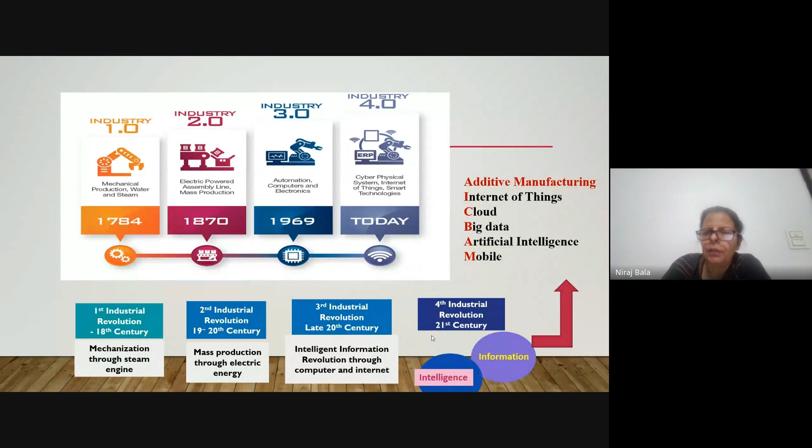This was followed by the second Industrial Revolution in the 1870s, when the assembly line, production line started. Then the third revolution, when computers and automation started. And today, participants, we are part of Industry 4.0. If you see the various technologies which are driving Industry 4.0, amongst the other technologies, you will see that additive manufacturing is one of the core technologies driving our present industry. So it is essential that we understand, we work on this additive manufacturing, and we introduce this technology to our technical students.

So additive manufacturing, also known as 3D printing, I will not go much in detail because of the introduction. I will mostly be discussing the topic given to me, that is, what are the different materials which we use in additive manufacturing. But just a brief introduction: 3D printing is also known as additive manufacturing because we are not subtracting any material like other manufacturing processes, we are adding materials, so we call it additive manufacturing.

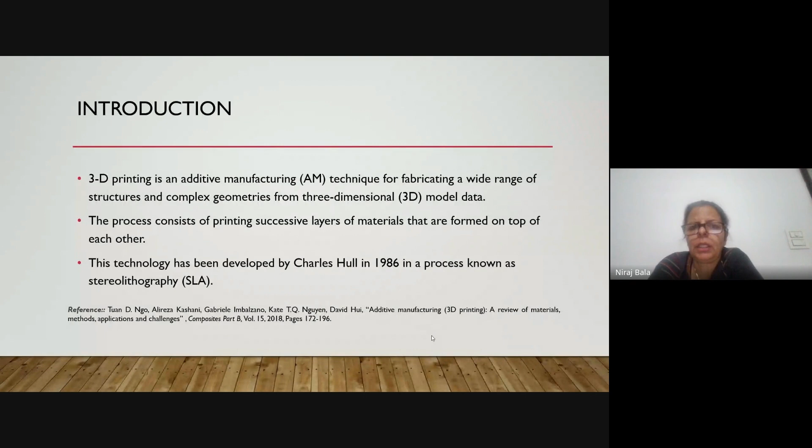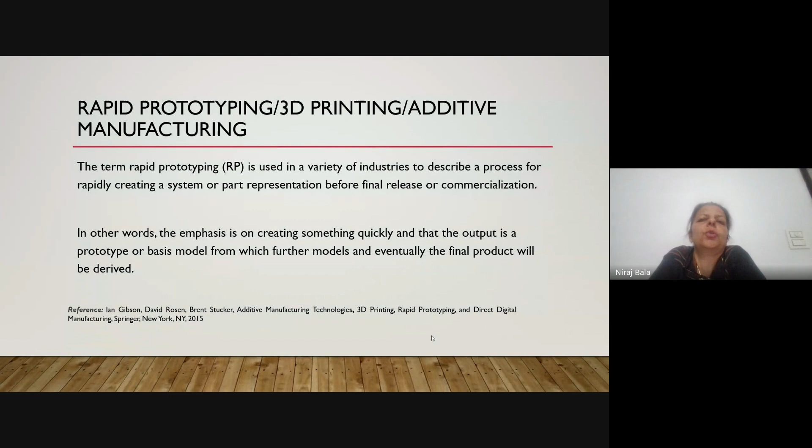Initially, when it started, it was such fast work that they started calling it rapid prototyping. The basic function of this 3D printer was to make prototypes, like small models, so that is why the other name used for this is rapid prototyping. It is also called 3D printing since it is additive in nature, so it is also known as additive manufacturing. So any of these names may be used. Sir might have already told you the process; it is a very basic generic process to print by using a 3D printer.

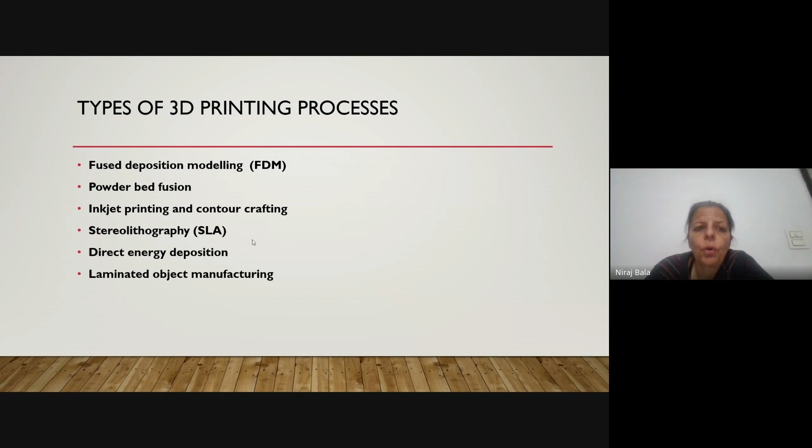Now we have different types of 3D printing processes for which different types of materials are used. One simple method is FDM, fused deposition modeling, which sir was also talking about. What do we have in fused deposition modeling?

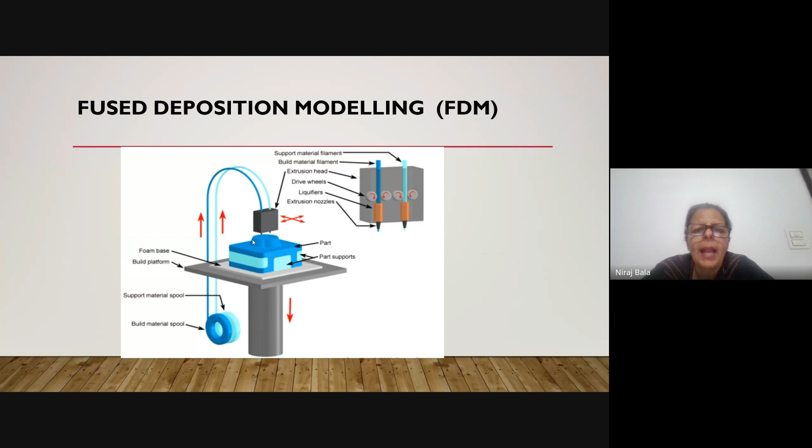In this process, you will see two different types of filaments, two shades of blue. One is dark blue and the other is light blue. The dark blue color is your input material. The light blue material is your support material to provide support. In fused deposition modeling, the material is provided in the form of a filament inside the 3D printer, and layer by layer, the final product is obtained.

So what type of materials are printed using this FDM process? You can see this small presentation model. Some food applications are also used, and for those having high heat applications, we use this fused deposition model for making the product.

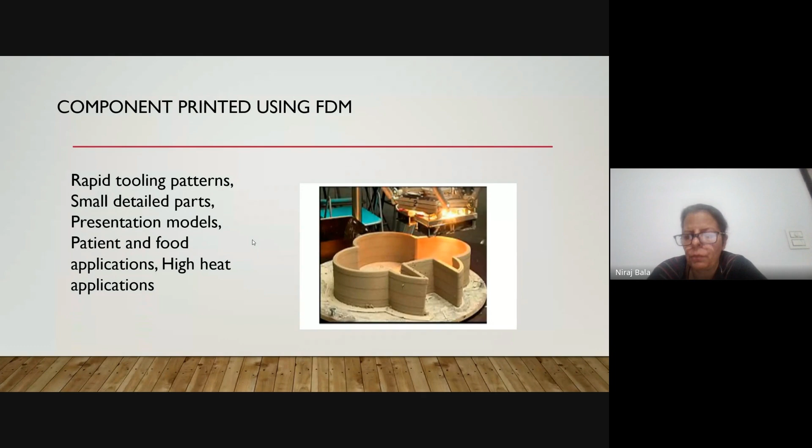So what are the features of this fused deposition model? It is very low in cost, the speed is high, and it's a very simple process. However, the mechanical properties are weak, as you can see from this figure, and the surface finish is not very good.

In order to avoid that, we can have fiber reinforced composites. So from the FDM process, you can prepare fiber reinforced composites and make different types of materials. Fiber orientation and bonding between these are the main challenges that arise in 3D printed composite parts. So this is one method, that is FDM.

Then powder-based methods are also there, in which the feed material is powder. If you see the previous method, it is in the form of wire. In case of powder bed fusion, the feed material is in the form of powder. Mostly under this powder bed fusion, we get metallic materials - it is used for metal printing mostly.

So one method is known as selective laser sintering. Another one is selective laser melting. Then we have direct metal laser sintering and electron beam melting. These are almost the same types of methods, only the source of heat is different. In selective laser sintering, we do not fully melt the material, but we just heat it at a temperature so that the fusion of the powders may take place.

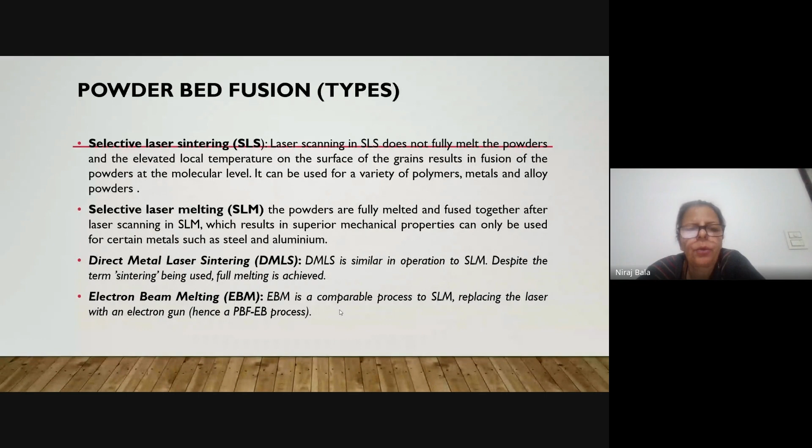There is reduced material wastage, improved production development times, capable of building functionally graded parts, fully customized parts can be made, good resolution, and effective recycling of unmelted powder. So the powder which is left, which is not converted into a 3D model, that can be again recycled. This is again, when we talk about sustainability, a good thing that we can recycle the powder. And in this case, we can also use different types of materials like ceramics, glass, plastics, metals, and alloys.

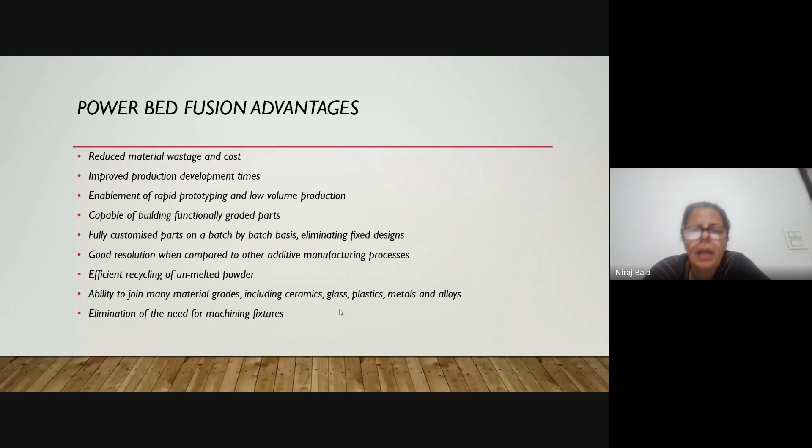Then elimination of need for machining fixtures. We do not require much fixtures. You just give the shape and we get the required shape.

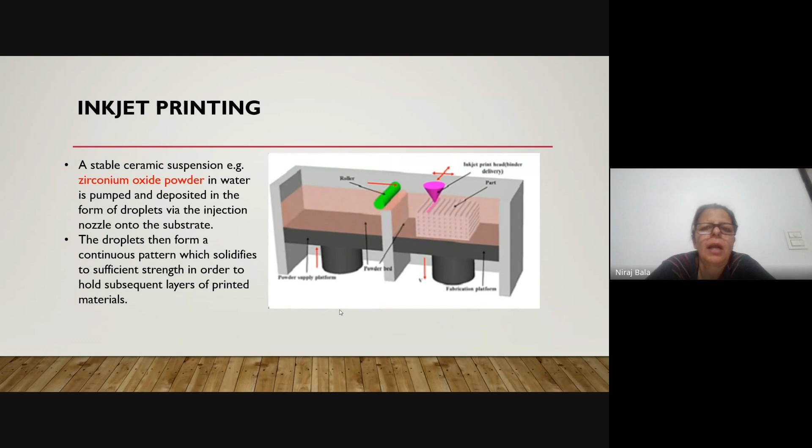So there is another type, inkjet printing. One example is given here. In this, we use some oxides like zirconium oxide powder. A suspension is created in water and it is deposited in the form of droplets. As you can see on the figure, in the form of droplets, by the injection nozzle on the substrate, we can obtain this by using an inkjet printer. I will show you one inkjet printer we also have at NITTTR Chandigarh.

So where do we use this inkjet printing? In this, wax-based inks are used. They are melted and deposited on substrate. Some inkjet printing is also known as contour crafting. So these are the two main types of inks used: wax-based and liquid suspensions like zirconium oxide in water.

So another method which we used is stereolithography. Dear participants, this is the oldest, or we can say the first type of method from where the 3D printing concept started.

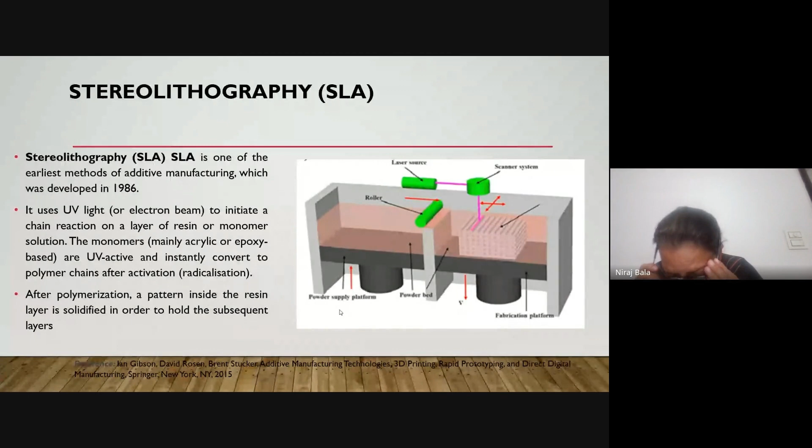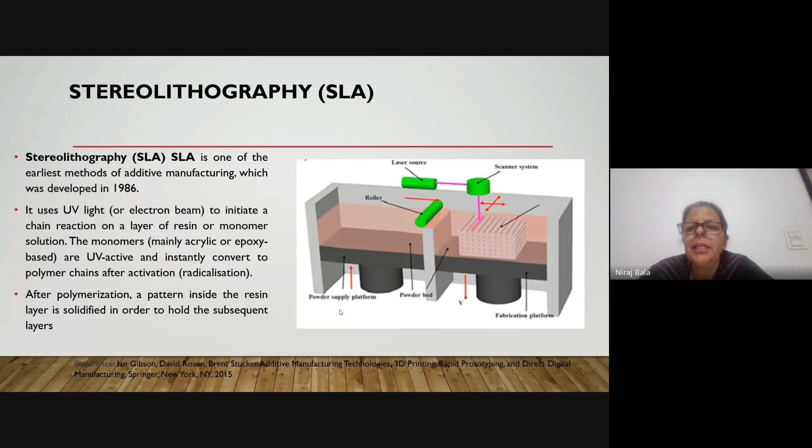Stereolithography is actually based on the concept that a monomer—we know how do we make a polymer, from a monomer we make a polymer. So in this case, a monomer is used, and with the help of an electron beam or a source of heat, the monomer is converted into a polymer chain. So initially a monomer part is used, which is further converted into a polymer. So the polymerization process takes place inside the resin, and it is solidified, and we obtain the final product.

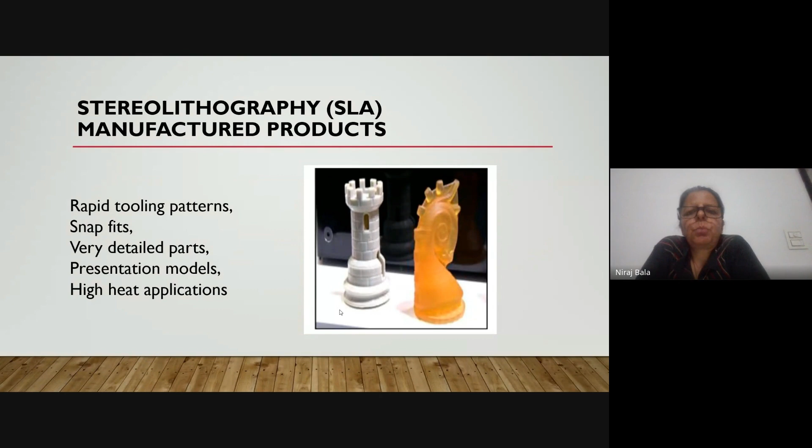So these are certain products which are made using stereolithography. You can see these are two products, the chess products which are used. These are made up of polymer, plastic materials. So rapid tooling patterns, snap fits, detailed parts, presentation models, and where high heat applications are required—these type of products can be made by this process, which is known as the stereolithographic process.

So there is another process. I will be showing you a number of applications. I am just telling you briefly the various 3D printing processes.

So we have another type, that is direct energy deposition. This is again a very common process, mostly for superalloys, where we want to 3D print superalloys. There we use this direct energy deposition process. This is also known as laser engineered net shaping, LENS. It is known as laser solid forming, LSF, directed light fabrication, DLF, DMD, direct metal deposition. This is also known as electron beam. So different names are there.

So in this, the source of energy is again laser or electron beam. Basically in this direct energy deposition, first of all the substrate on which you want to make the product is heated, and the feedstock material is also melted. So the feedstock material is melted on the substrate, and both are fused together. They are deposited and fused together. So by fusion, by direct energy deposition, the powder is moved, and the 3D printed material is obtained. This direct energy deposition also has a number of applications we will see in the coming slides.

The difference between DED and selective laser melting is that no powder bed is used in DED, and feedstock is melted before deposition. This method can be combined with conventional subtractive processes also. The materials used in direct energy deposition include titanium, Inconel, stainless steel, aluminum, and related alloys for aerospace applications. So DED is a very common process used for aerospace applications.

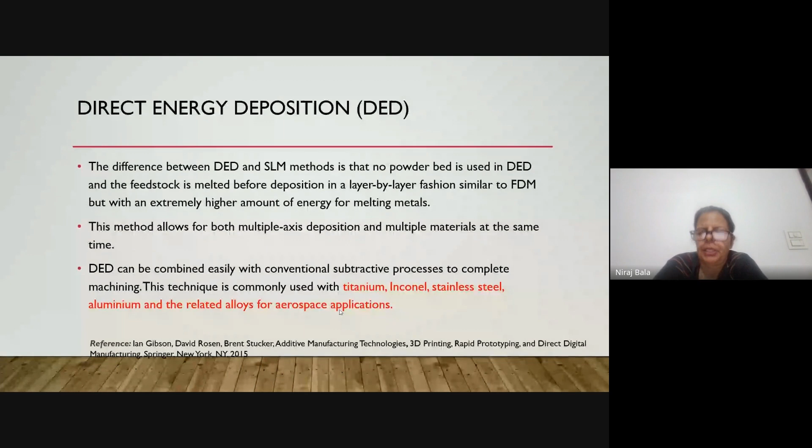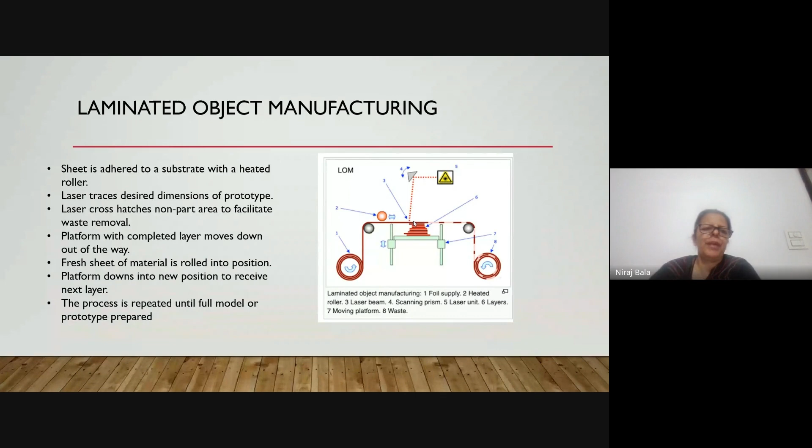So basically in laminated object manufacturing, a sheet is spread over the table, in the form of a laminated sheet. A new sheet comes, and the specific shape we require is cut with the laser. Layer by layer, the final product, model, or prototype is obtained. This process is based upon the sheet material, and a fresh sheet is used every time.

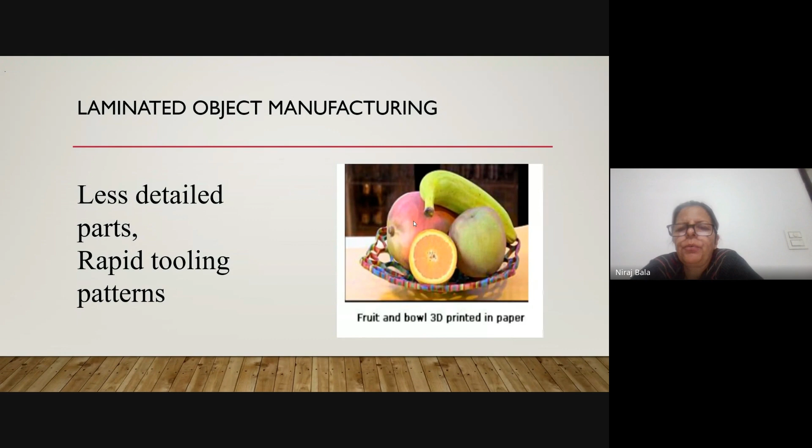Dear participants, I have quickly shown you various processes and the materials used. The basic purpose was so that when we understand the applications, you have some idea of the process used. Stereolithography finds application in lithium disilicate glass ceramic, fabrication of heart valve scaffolds. Fused deposition modeling is used for drug delivery pattern making. Powder bed fusion is used for smart parts, lightweight robotic parts. Selective laser sintering is used for biodegradable polymers, rapid tooling. Binder jet is another method. Direct energy deposition is used for preparing stainless steel and automotive dies.

So the use of 3D printing for making models - why do we use 3D printing? The first applications of 3D printing were for models only, because they are very quick. You just prepare a drawing, feed it inside the machine, and you get the final product. It was a very easy and quick process. That is why initially 3D printing was used for making models, prototypes, or small products.

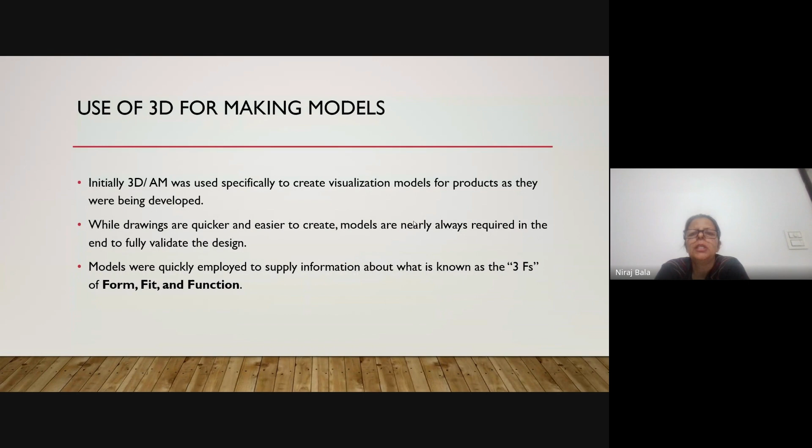Because of its 3F meaning - form, fit and function - you could easily make the required model. Now let us see the various materials and applications of 3D printing. In aerospace - previous Dr. Hitesh was also talking about this when I joined, that it is finding applications in aerospace. Why do we justify it for aerospace? Major applications are in aerospace, and I will show you a few slides where it is now basically used for biotechnology as well.

Why aerospace? I will show you one 3D printer that is there at NITTTR. It is very costly, the cost is very high. If you talk about mass production, if you want to mass produce a product, this 3D printing is comparatively expensive. But we know that aerospace is an application where cost is not the main concern, we want to make planes lighter in weight and safer. So there the cost is not a big question, and 3D printing has been used quite a lot for various parts of the aeroplane.

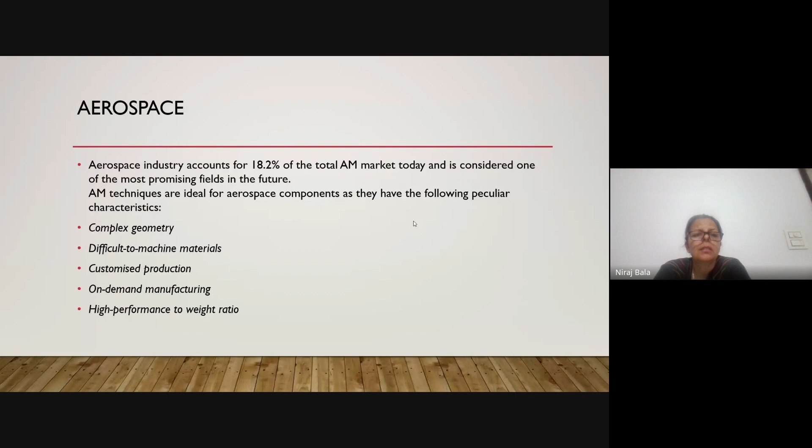So 18.2% of the total additive manufacturing market is with the aerospace industry. It is ideal for aerospace because of complex geometry, and the materials used in aerospace are so strong that their machining is very difficult. We require customized production and on-demand manufacturing, plus very importantly, high performance to weight ratio. Because of these applications, 3D printing is used for aerospace.

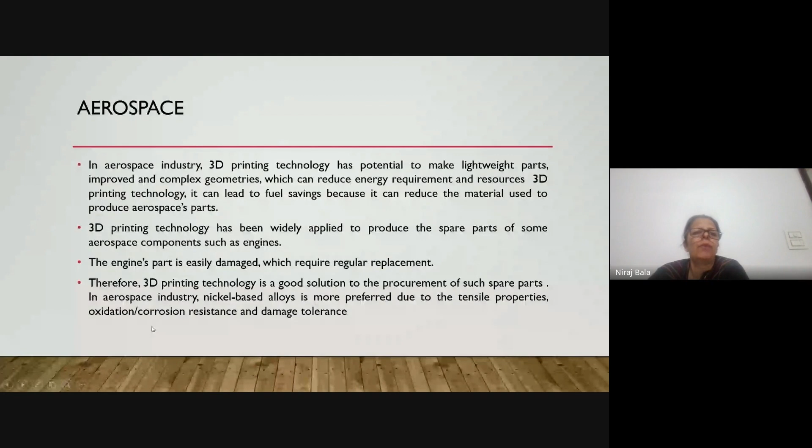It has been widely applied to produce spare parts, so 3D printing is a good solution for the procurement of such spare parts. Which type of materials? Nickel-based alloys are more preferred due to the tensile properties, oxidation and corrosion resistance, and damage tolerance. So it finds a lot of applications in aerospace.

Similarly, additive manufacturing finds a lot of applications in the automotive industry. Wherever structures are complex, machining becomes difficult, so there you can go for 3D printing. Local Motors has 3D printed an electric car, which they made in 2014.

They also extended the wide range of applications of 3D printing. They call this bus OLLI. OLLI is a driverless, electric, recyclable, extremely smart 3D printed bus.

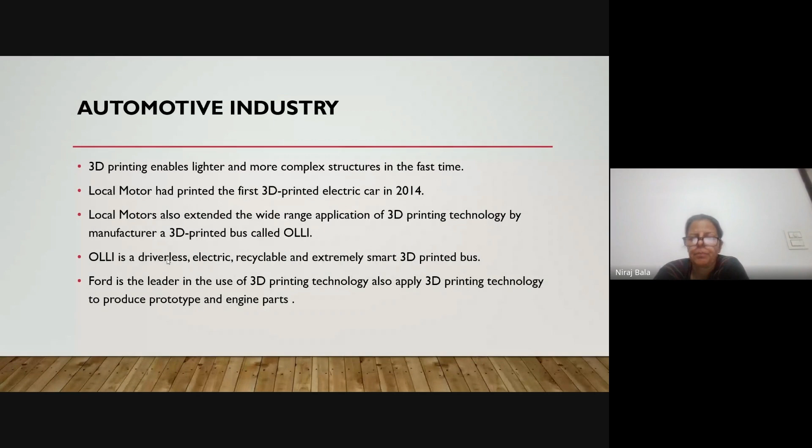Ford is the leader in the use of 3D printing. They apply 3D printing technology to produce prototypes and engine parts. BMW is also using it to produce hand tools for testing. Audi collaborated with SLM to produce spare parts.

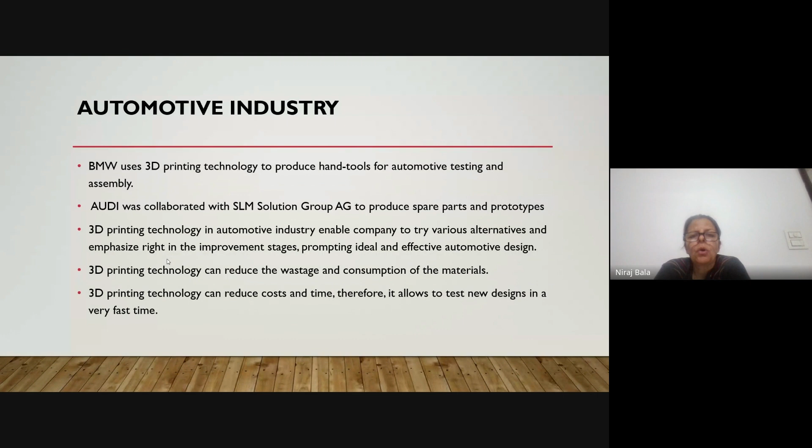Many other automotive industries have used 3D printing technology because it leads to reduction in wastage and consumption of material. So it reduces cost and time, and therefore allows testing new designs in very fast time.

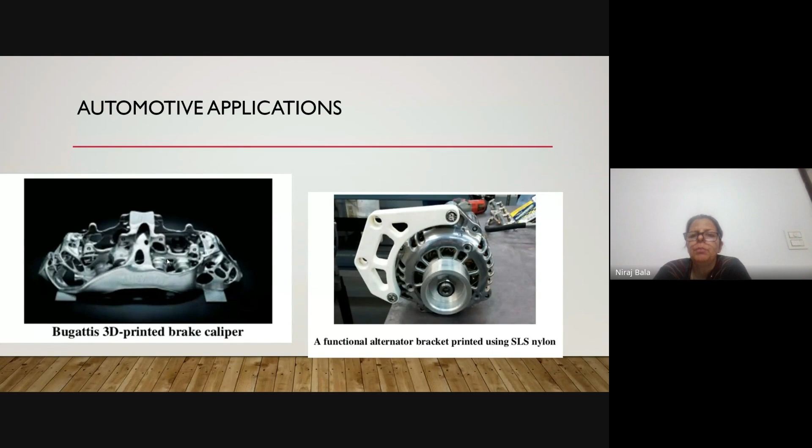So these are two automotive applications: Bugatti's 3D printed brake caliper, and on the right hand side, a functional alternator bracket printed using SLS nylon. This white part has been made using nylon.

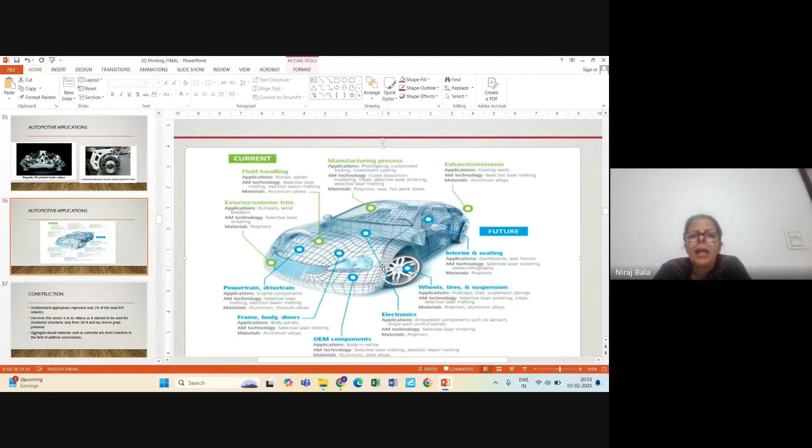Then the second part, fluid handling, for pumps and valves. Inside these pumps and valves, they are made by selective laser melting and electron beam melting, using aluminum alloy. In this manufacturing process, prototype customized tooling, investment casting, fused deposition modeling, inkjet, and selective laser sintering have been used, with materials being polymer, wax, and hot work steels.

Then in the exhaust emission part, the cooling vents have been made using selective laser melting, with aluminum alloys used. So all these green parts in this particular car have been done by 3D additive manufacturing processes.

But in future, the powertrain and drivetrain, meaning the engine components, selective laser melting can be used, with materials being aluminum and titanium alloys.

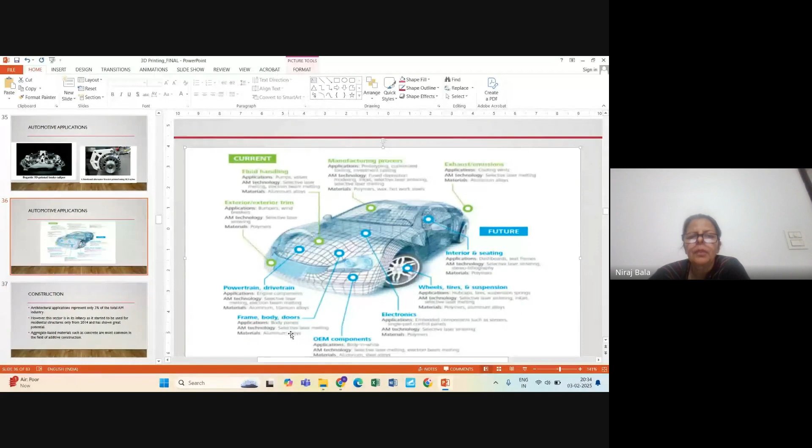The frame, body, doors, and body panels can also use selective laser melting with aluminum alloys. The body in white, and certain electronic parts on the dashboard, can be made by selective laser sintering, such as embedded components like sensors and single part control panels.

For the wheels, tires, and suspension springs, selective laser sintering and inkjet selective laser melting can be used, with materials being polymer and aluminum alloy. The interior, seating, dashboards, and seat frames can also be done by additive manufacturing, using polymer as the material.

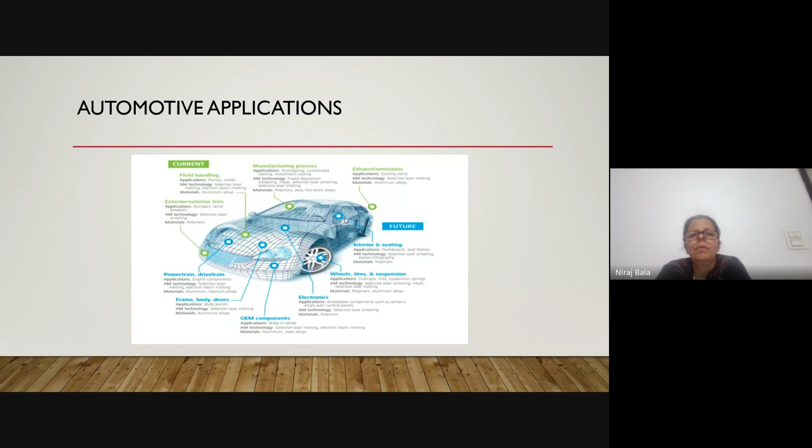So dear participants, this picture on a whole gives you an entire detail on how 3D printing has changed the picture, and how so many parts of an automotive can be printed using this 3D printer.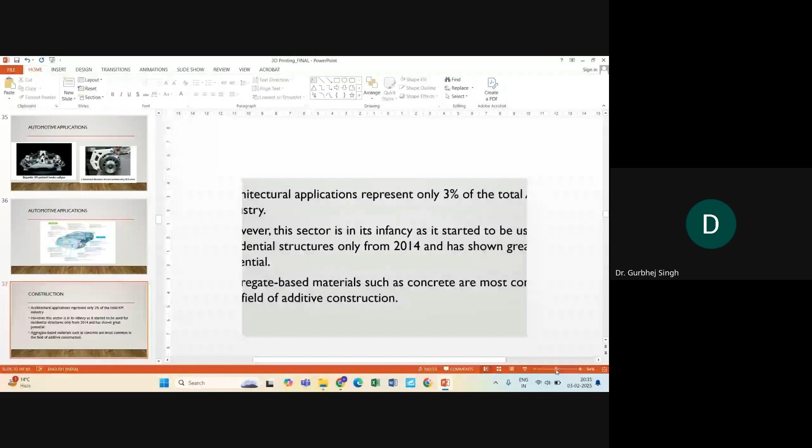You can continue. So, another application. Till here we have mostly covered the mechanical applications in aerospace and in automotive. Another application is in construction.

You will be astonished that architectural applications represent 3% of the total additive manufacturing industry. However, this is still new, but a lot of applications are there in construction. Concrete is the material used for building construction, and this concrete material has also been used as a material for 3D printing.

So here I have shown these two pictures. You can see this is a type of big jet type of printer.

This printer works with a robotic arm. You can take it on site where you want to make a 3D printed product. I'll show you some photos of a complete house made by 3D printing, and later some applications where 3D printers were used during COVID.

Here you can see a robotic arm. They are 3D printing using concrete as the raw material. This robotic arm is printing here. The digital construction platform at MIT University uses this technology.

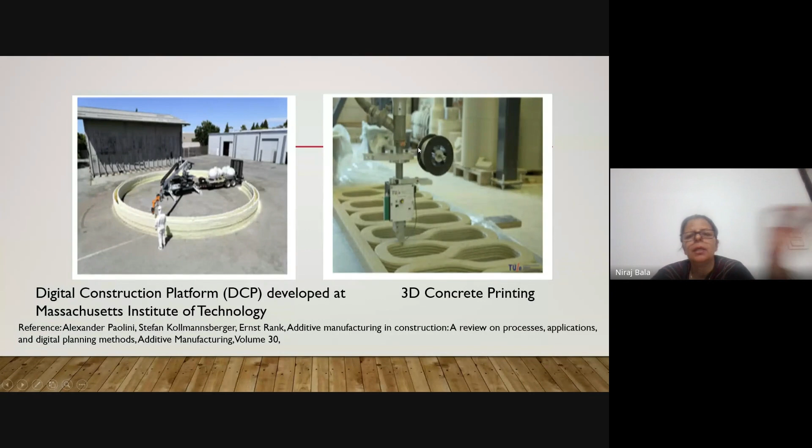This is very common - a lot of decorative pieces are made with 3D concrete printing. This machine makes a decorative piece to be used in homes or other applications. Here's another 3D printer doing 3D concrete printing.

Totally 3D printed houses have been built. This is the first 3D printed house, known by DUS Architects. This second one is the 3D printed house by WinSun. Can you imagine? These two houses have been totally made by 3D printing.

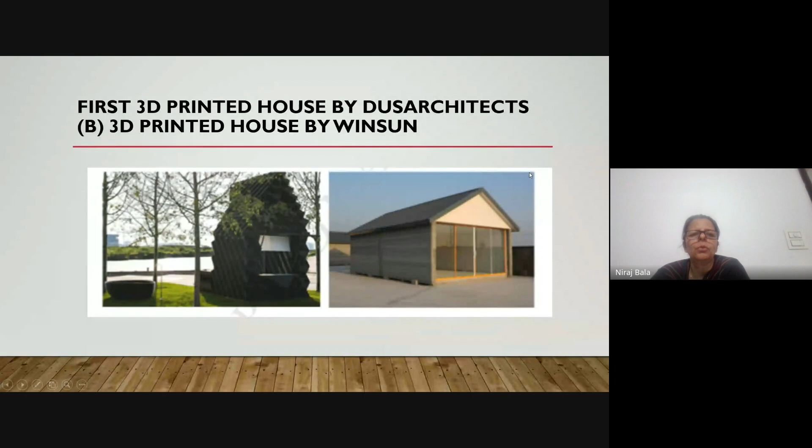I think you must not be aware that 3D printing is used in the food industry. Were any of you aware that we are using 3D printers in food also?

There is a growing demand for the development of customized food. If you have special needs, like athletes, children, pregnant women, or patients requiring special nutrients, these types of food can be made by 3D printing. Development of customized food must be conducted in detail.

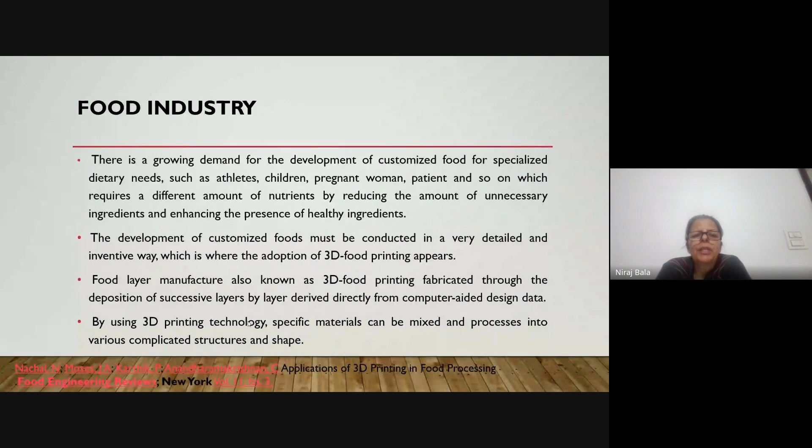This is called food layer manufacturing, also known as 3D food printing. Let me show you how.

There are certain types of food which you can easily print, for example sugar, chocolate, puree - food that can flow easily can be easily 3D printed. Things like pasta sauce and pizzas can also be printed this way.

This technology is highly energy efficient for food production. You can produce healthy, clean, more hygienic food since you're not touching it during 3D printing. It's also been used to make special diets or customized food.

What is the basic fundamental behind 3D food printing? First you divide food into two types: printable food and non-printable food. Printable food means food that can flow, like gels and jams - these materials can easily be printed.

Non-printable food means things like wheat and rice - very difficult to print because they cannot flow. These types of foods must first be converted into printable foods by mixing them with a particular gel or sauce so they can be printed.

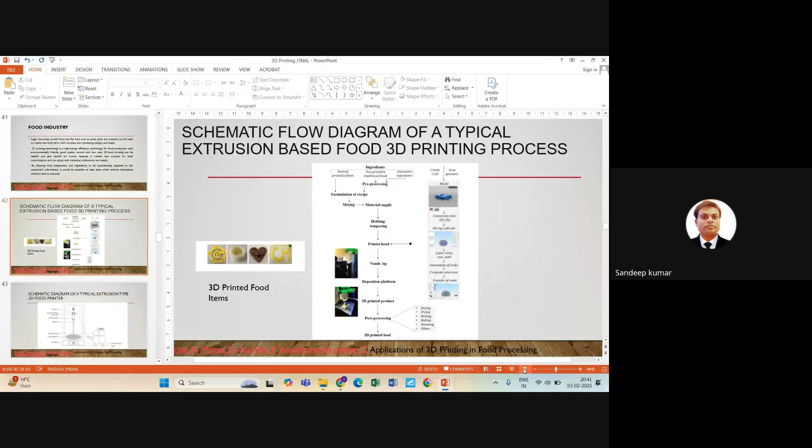Yes, is anybody asking a question? Somebody is speaking. Hello, yes, mute yourself please. Hello. Mute yourself, participants, kindly mute yourself. Who is disturbing?

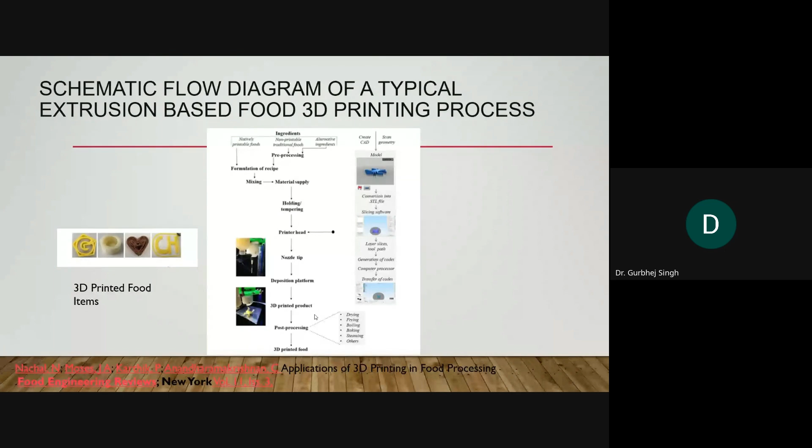So from the printer head you give the file, and here you get the raw material. From the nozzle, the final product is obtained. You can see this small product - this is a 3D printed product.

Whatever post-processing is needed, like drying or heat treatment - you want to fry it, boil it, bake it, or steam it.

So whatever post heat treatment is required, you can do the post heat treatment here. But finally, your 3D printed food will be prepared. So this is how we obtain these 3D printed food items, in different shapes. This is how now they have started using 3D printing for food items also.

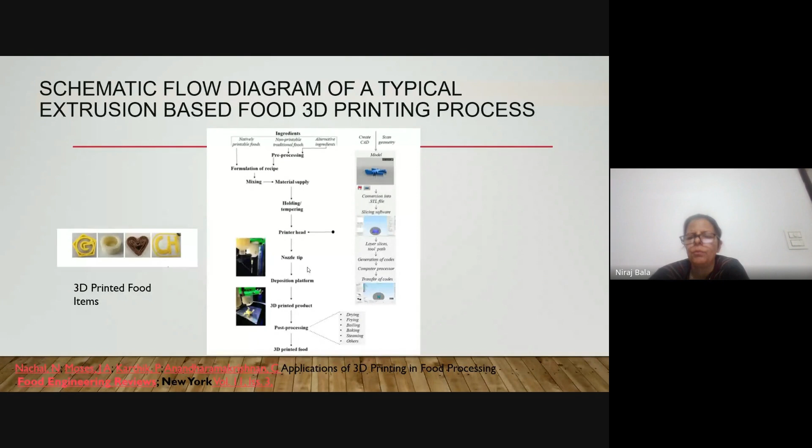So dear participants, one major application of 3D printing is in biomedical application. Why do we talk about biomedical application? Because the cost of the material is justified when we are talking about any part which has to be used in our body. Secondly, each person has a different shape, different size. So when we want to make some product or part for our body, we can customize it by using 3D printing. So let us see various applications of 3D printing in the biomedical or medical sector.

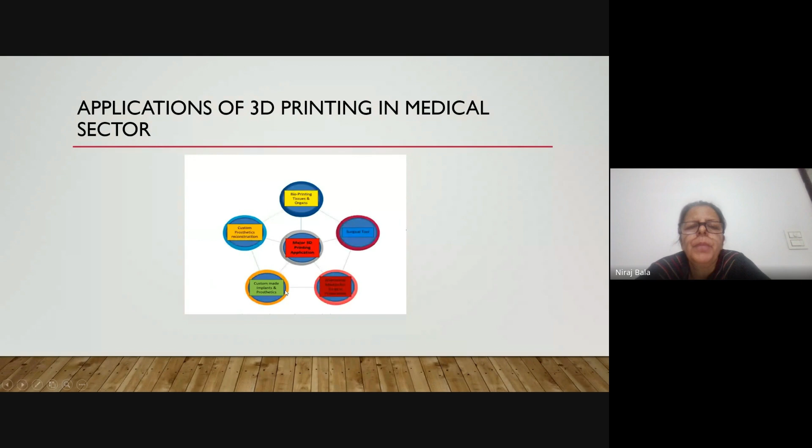So here I have shown you bioprinting tissues, surgical tools, surgical models, custom-made implants, prostheses, and customized prostheses. So these are some of the applications of 3D printing in the medical sector.

So in biomedical, it is a branch of technology that deals with the production of all material, apparatus, and devices that can be used for diagnosis or treatment in medicine. So artificial kidneys, heart, dental implants, knee prostheses, lenses, pacemakers, and hip joints - all these are the applications of biomedical implants.

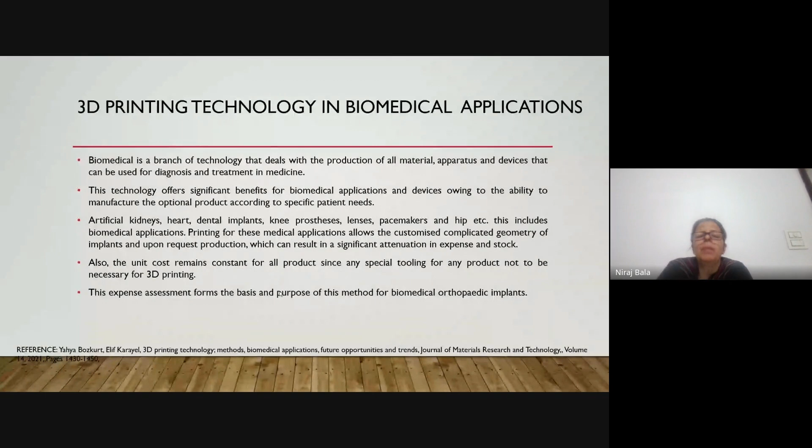Then unit cost remains constant for all products since special tooling is not required. This expense assessment forms the basis for this method. So maximum exploration of 3D printing is in the biomedical field.

So I have drawn one better figure showing the different types of biomaterials, because the topic for our presentation is the materials for 3D printing. So here we will see this slide covers all the different types of biomaterials used for bioimplants. So there we have synthetic or polymeric based biomaterials.

You must not be knowing many names, but these are all the polymeric based materials. If you see here, ABS which is known as acrylonitrile butadiene, then polylactic acid, then PEEK is another material, polyether ether ketone, PCL, then poly-D-lactic acid, PDLLA, and polybutylene, then polypropylene. These are certain polymeric based materials which are used in 3D printing.

Then we have ceramic based materials - hydroxyapatite, tricalcium phosphates, and silica - these are also used. Composite materials, these are polymer based, composite made of hydrogel, then ceramic based. Then hydrogels which are used as bioinks - these are agarose based, alginate, collagen based. You must have heard certain names. Silk based, gelatin, cellulose based, cell aggregates, and synthetic biomaterials.

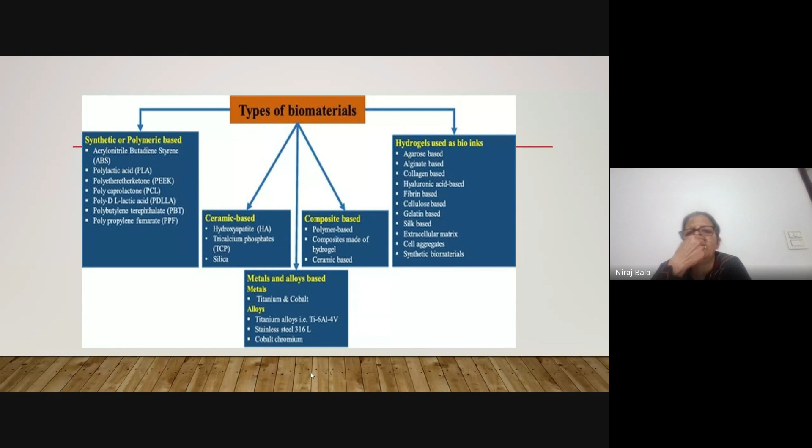In the end, I will give you one link of a paper. So I have taken this from one of my papers we just published, I along with two others. We published one paper on applications of these biomaterials, 3D printed biomaterials. So I have taken these diagrams from my paper only. I will give you the link if you want to refer to these biomaterials in detail.

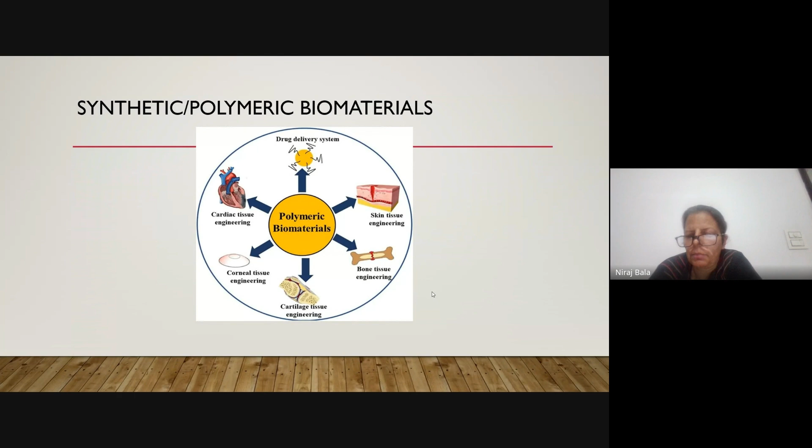So let us understand different types - the first one we covered here was the polymer based or synthetic materials. So the polymer based materials find applications in cardiac tissue engineering, drug delivery systems - I will show you details also - skin tissue engineering, bone tissue engineering, cartilage tissue engineering, and corneal tissue engineering. So all these polymer based materials which we have listed here, ABS, PLA, PEEK, they are used for these applications.

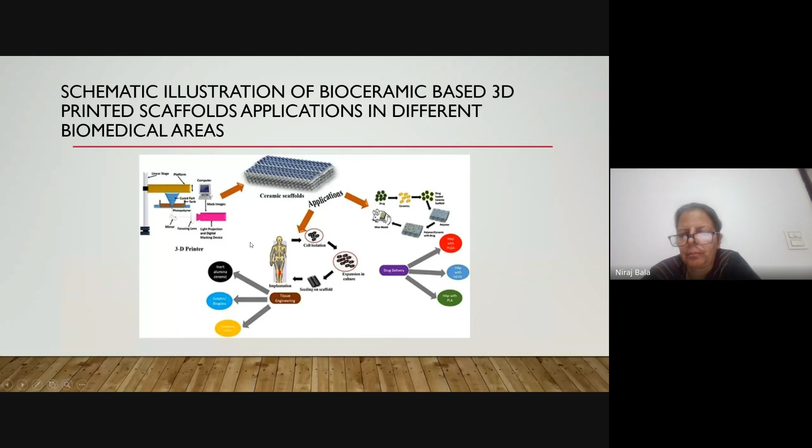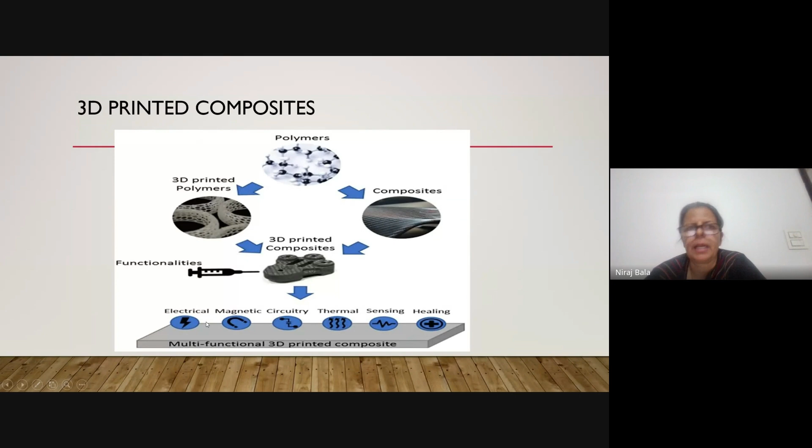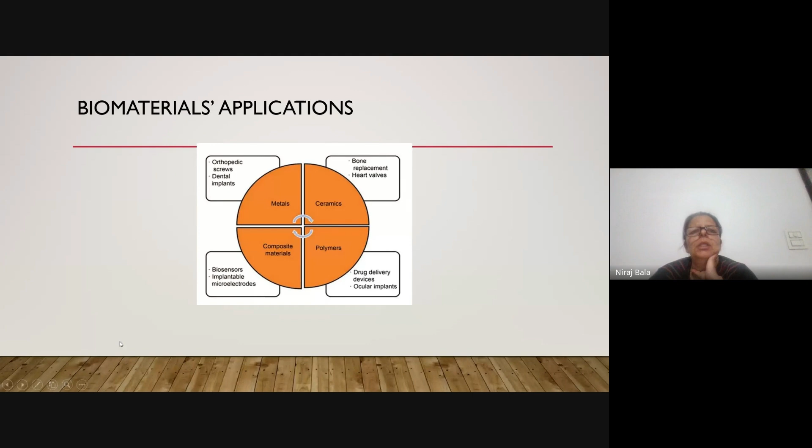Then bone replacement and heart valves are also made by ceramics. The drug delivery devices use polymers as the material. Then composite materials are used for making biosensors and implantable microelectrodes. So these are all the applications in the biomaterial field.

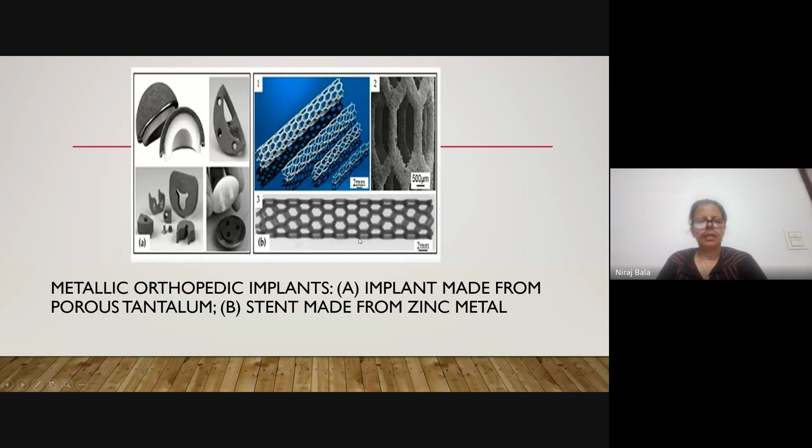Can you see here? So these both materials are done by 3D printing - metallic orthopedic implants by 3D printing, and these are the stents which are being 3D printed, made up of zinc material.

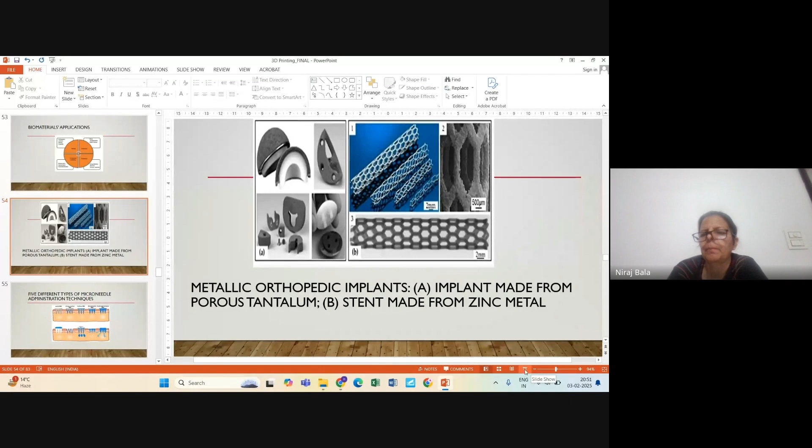So another application, a very new application for 3D printing, is like we are administering some medicine inside your body, like insulin. Some people who are suffering from blood sugar have to inject themselves with insulin.

So this is a new method of injection. Microneedles are used for administration of medicine.

If you see here, these are 5 different types of microneedles prepared by 3D printing. The first one is totally solid microneedle. The second one is drug-coated microneedle. The third one is hollow microneedle.

And this one is dissolvable. And the last one is hydrogel-based microneedle.

So the first one, if you see here, when it is inserted inside your body, this solid microneedle will release the medicine inside your skin or whichever part it is inserted. So this is a new way of administering medicine, like insulin and other methods are used.

So in the solid microneedle, it will go inside and it has the medicine inside it only, and it will produce the medicine, these dots, when it is inserted inside the body. The drug-coated microneedle has the drug in the front of the microneedle.

So the drug is coated on the microneedle. This blue part shows that it has been coated by the drug.

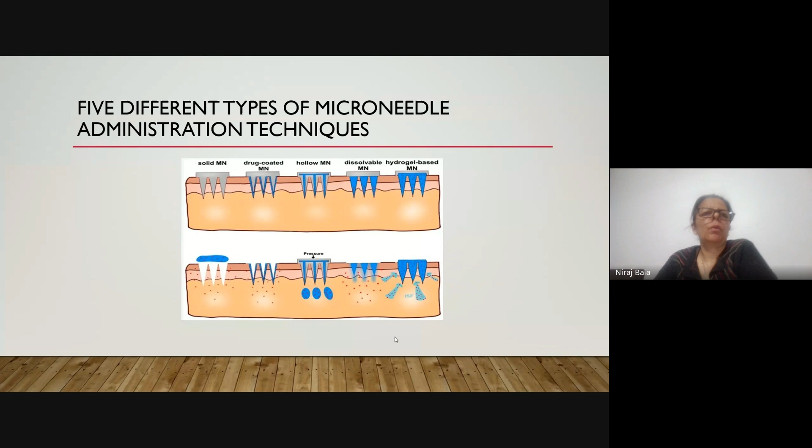These are the 5 different types of microneedle administration techniques. These are the latest techniques. Some other applications, surgical applications.

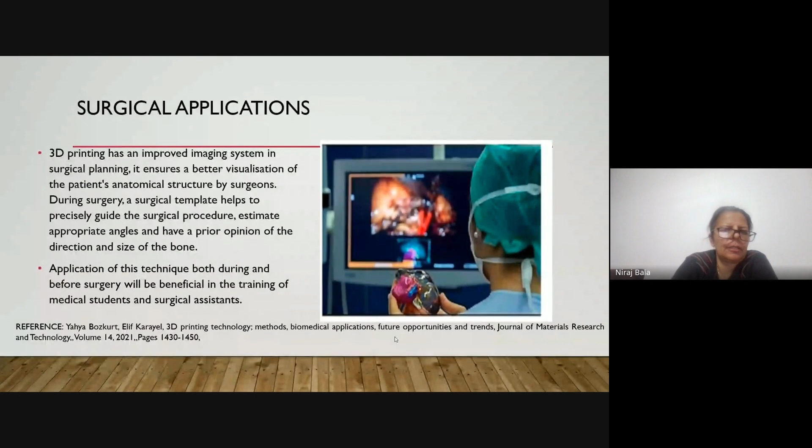So some other surgical applications include 3D printing. In surgical applications, when you are studying some complex parts, we want to see the imaging and make some anatomical structure. It is very easy to make it with 3D printing.

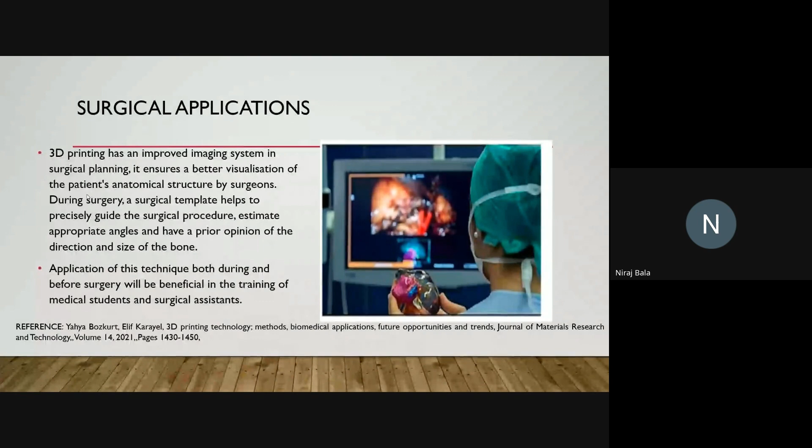So here, this is one part they have made for understanding the problem, for understanding the body parts, for the study purposes, and also for understanding the surgical parts. So 3D printing is used for hearing aids also.

I will show you these 3 different applications. The first one is 3D printed liver. You can see they have printed it, totally 3D printed liver is there.

The second one is your kidney model produced by additive manufacturing. So it is very easy for the students or for the doctors who are studying, or those students who are doing MBBS, to understand the structure by using this part.

So the third application is in hearing aids. This hearing aid part is also made by using 3D printing. So these are the 3D printed organs which have been printed by using 3D printing.

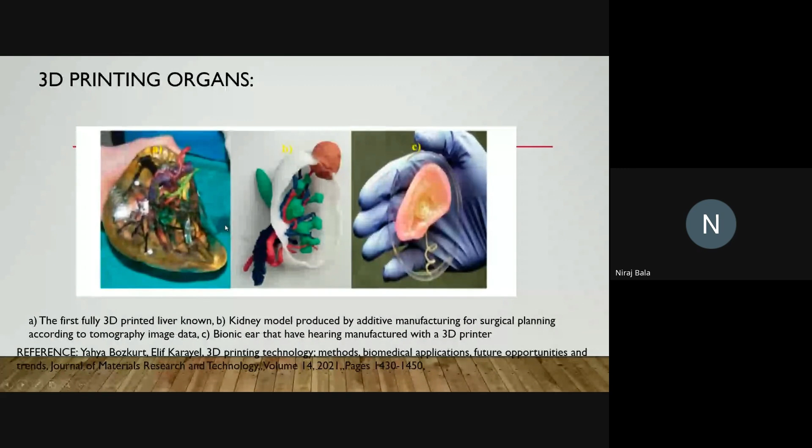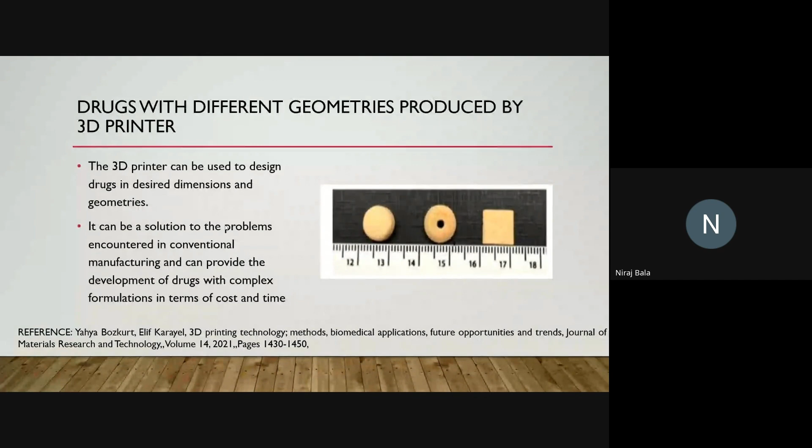Then various drugs also - that means the tablets which we eat, the capsules which we eat, the different geometries are also made by using 3D printing. So here different types of 3D printed drugs have been used by using this 3D printer.

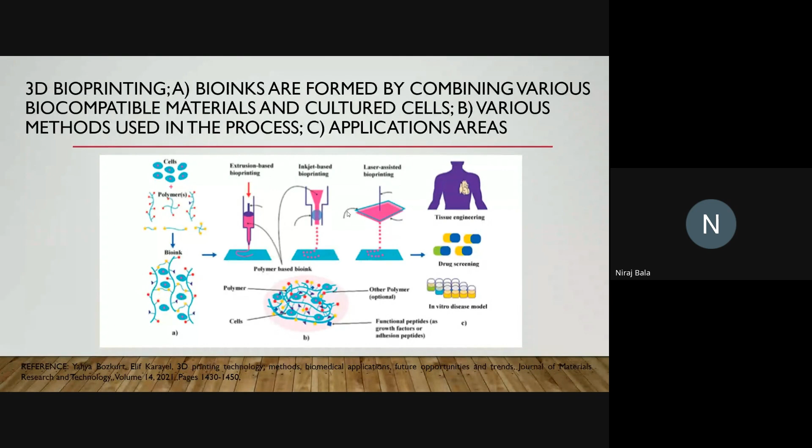These are very common. But dear participants, another application of this is in tissue engineering. A very new application is in tissue engineering.

What they are actually doing, even for tissue, meaning the body part which is damaged, they replace it using 3D printing. So suppose some tissue part is defective. By doing a biopsy, they isolate the cells from your body, and then they grow your cells outside your body by cell culture.

In order to provide strength, the scaffold is made using 3D printing, like the scaffolds I showed you in the previous slides. The isolated cell is grown outside, the scaffold provides strength and mechanical support, and the tissue is grown on the scaffold. Then we replace the old tissue with this new tissue.

The old tissue is removed, and again we implant this new tissue inside the body. This is very rare now, growing your body part outside in the lab, and then putting it inside your body.

You must have heard that when a new child is born, many hospitals ask if you want to keep the stem cells of your baby. So many people preserve the stem cells of their baby. The purpose is that in future, if that child has some disease or faces some problem, they can grow that cell and replace the damaged cell with these stem cells. That is the purpose of preserving stem cells.

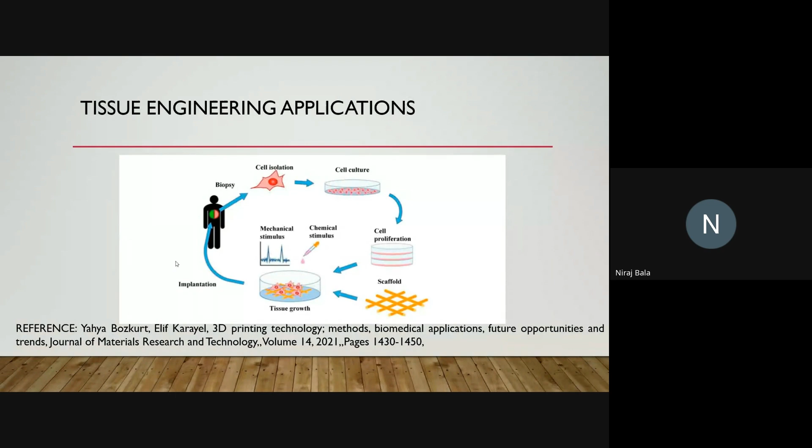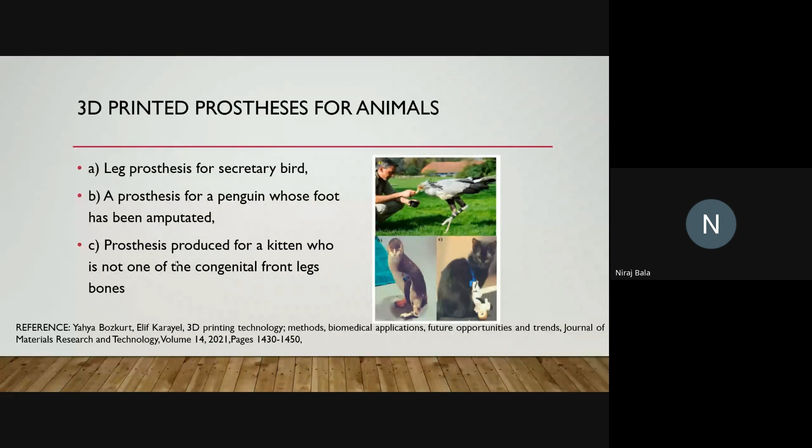These are certain other applications where some animals, if they have a leg problem or other problem, 3D printing is used to make leg prosthesis. A penguin whose foot was amputated had it replaced. Kitten legs too, so they are using 3D printing.

I will give you a few more slides on how 3D printing was used to fight COVID-19. Dear participants, we know that during COVID there was even an advisory from the World Health Organization that certain things had fallen short.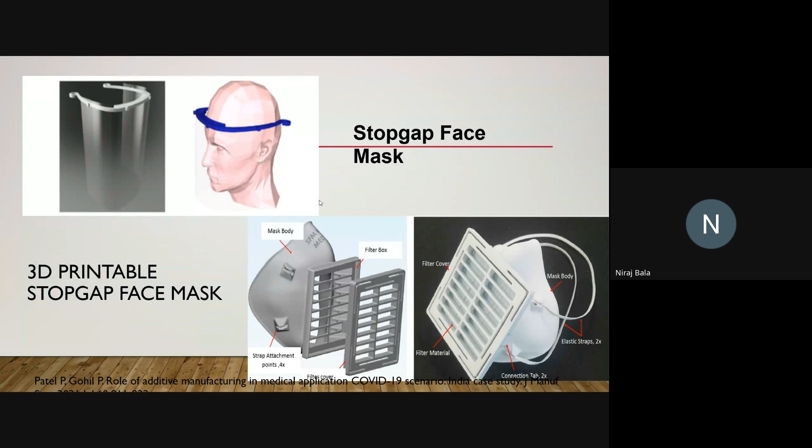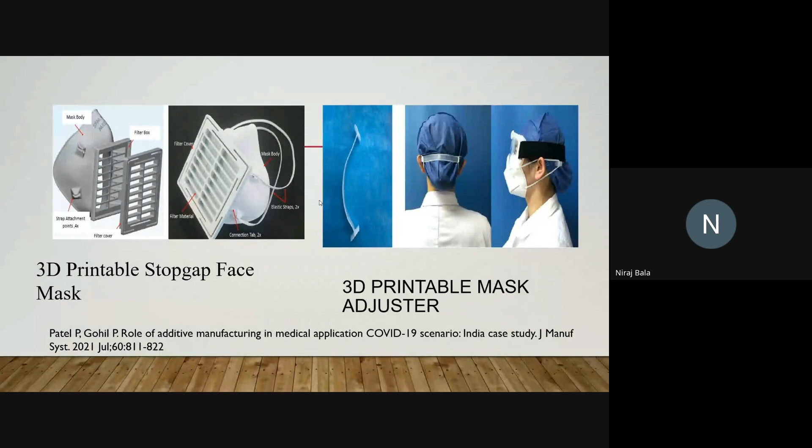So even these adjustable mask adjusters were made by 3D printing. Then another one, a 3D printable stopgap face mask. So all these applications, 3D printing was used during COVID. We are also aware there was a scarcity of ventilators, so a lot of parts of the ventilator were printed using 3D printing.

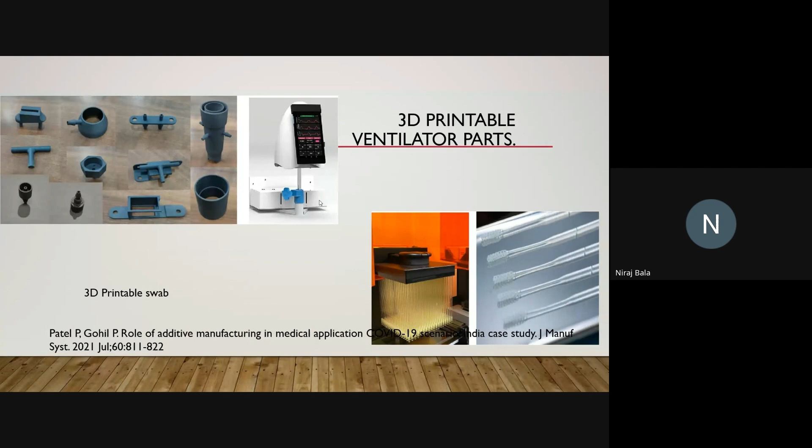These swabs, anybody remember what they were used for? For taking samples. If you wanted to travel somewhere, you would have to get a COVID test done, so these swabs were also printed using 3D printing. These are some of the applications of 3D printing used during COVID.

Even I was showing you some in construction. Similarly, during COVID, these 3D printable isolation wards were also used. These were all done by 3D printing - isolation wards, totally 3D printed.

Some other applications were some parts of drones. The drones were used for carrying medicines, for carrying foods. These drones were also used for disinfection, for disinfecting various parts. So a lot of parts of these drones were also made by 3D printing.

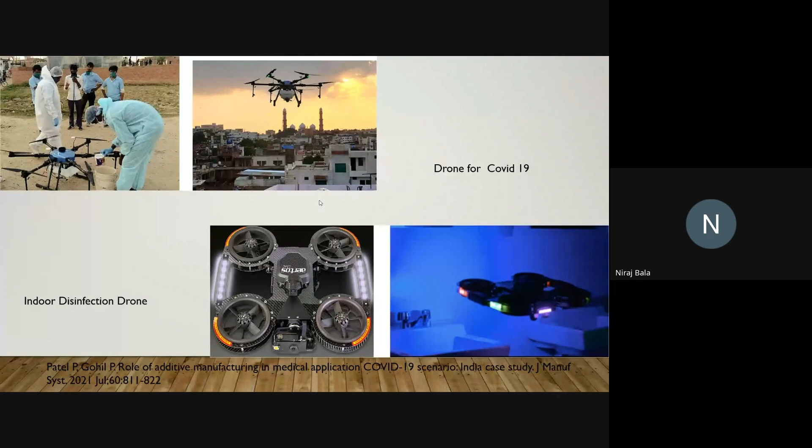So dear participants, as I told you, these are the 3D printers we have at NITTTR. This one is a selective laser melting printer, a metal printer, actually very costly, in crores. Here the input powder is in the form of a powder - a metallic powder can be used - and you have to give the drawing. The pen drive is fed here, you put the powder, and the product is 3D printed.

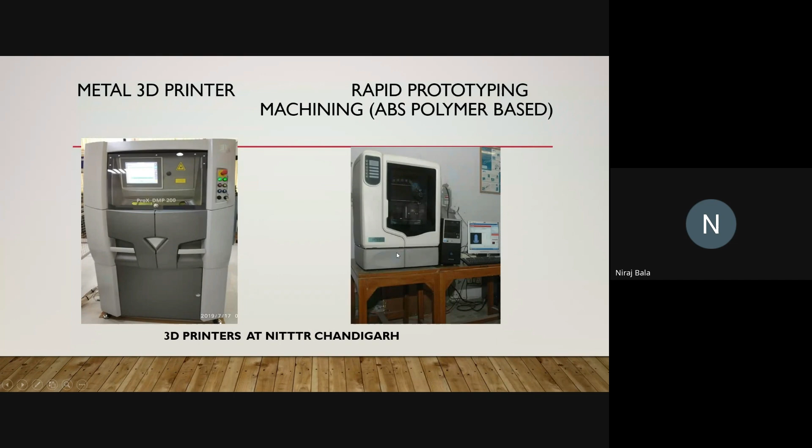This is a second type of 3D printer we have - a polymer based 3D printer, a simple printer. The drawing is made here and fed inside this printer. This is an ABS polymer based printer, a rapid prototyping machine, not very costly. This is a sample one of my MTech students has made. This is how the 3D printing comes out.

So the base is the metal plate. We gave this command for tensile pieces - simple rectangular pieces, and these were pieces for wear testing. We made a drawing on this page, the drawing was given, and you can see, by using this metal 3D printer, this printing was obtained.

If you see here, the powder is steel - 17-4 PH stainless steel was used. Basically, the powder is sprayed in the form of a layer, and using the laser, it is cut in the specific shape, and we get this product. You just remove these samples from the base plate, and your final product is ready. These are the actual samples one of my students printed using the 3D printer.

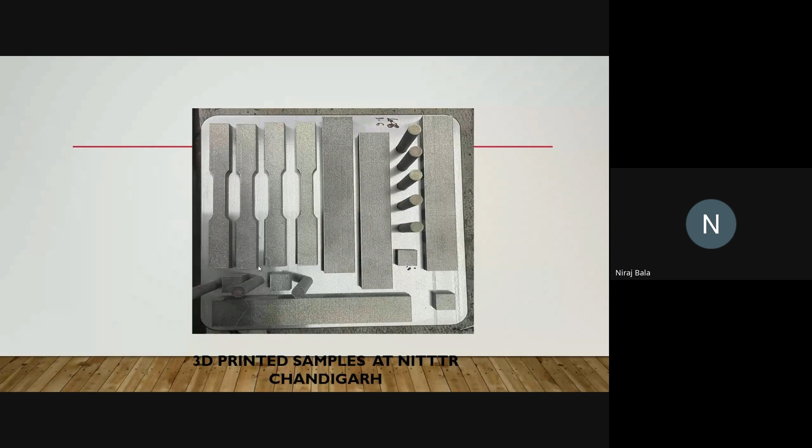So dear participants, last 2-3 slides, then we can have 10-15 minutes of discussion. I would like to add, after 3D printing, you must have heard about 4D printing. Anyone heard about this 4D printing? What is 4D printing? Anyone knowing anything about what 4D printing is?

This concept of 4D printing was first proposed by Professor Tibbits in 2013, not a very old concept. In this, smart materials are utilized to construct 3D microstructures which have the ability to change in a preset way as time progresses. So 4D printing is actually, if you see, the addition of something with respect to time - the addition of 3D printed products with respect to time.

Just a simple concept - what was 2D printing? 2D printing is nothing but a paper on which you have printed along length and breadth. And what is 3D printing? 3D printing adds height to the 2D print.

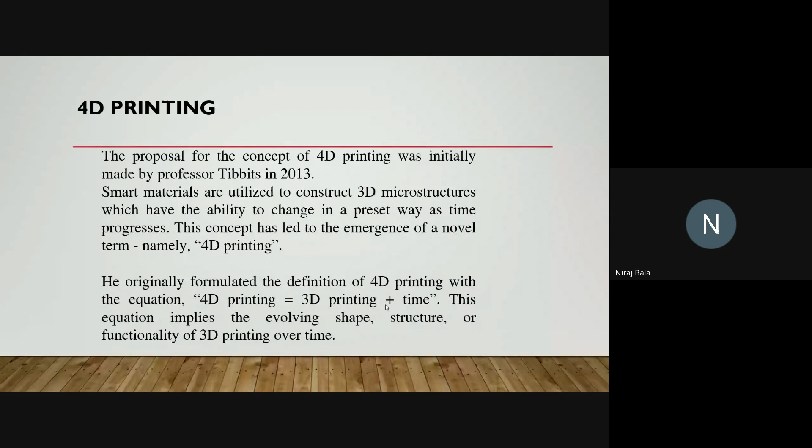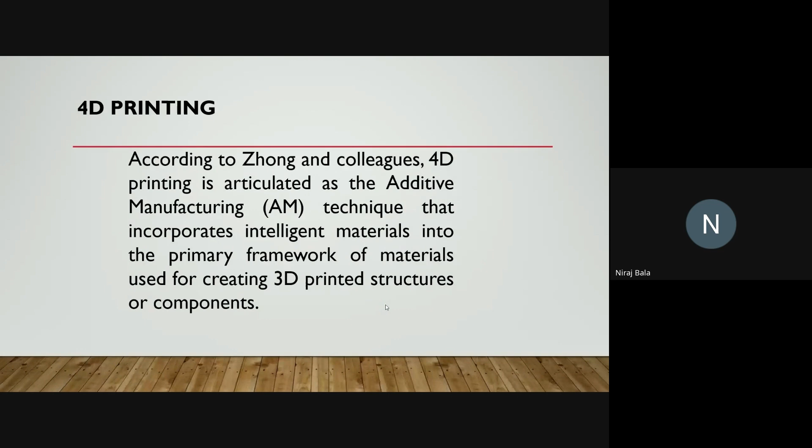So in 3D printing, you give it a height. If you have a 3D product and it changes its shape, structure, or some other functionality with respect to time, then we call it 4D printing. A 3D printed product which changes its shape, structure, or functionality with respect to time is known as a 4D printed product. According to Zhong and colleagues, 4D printing is articulated as the additive manufacturing technique that incorporates intelligent materials into the primary framework of materials used for creating 3D printed structures. So how does it work?

That means the characteristics of these objects, including color, size, and form, are subject to alteration due to changing environmental factors and triggers. Have you seen some sort of jellies? Let us suppose when the temperature increases, they expand, so they change their shape. So if it is a 3D printed product and it changes its shape with respect to any external factor, then we call it 4D printing.

Now this external factor can be pH values, water, temperature, or pressure. You must have seen certain jellies like we have at home. If you put water in it, the jelly expands, and when it expands, it starts giving out some smell. So that is also an example of 4D printing.

A lot of applications are used. For example, a flat surface is there. When you put in water, it expands and makes some particular shape. So on the internet, you will see a number of applications of 4D printing.

Basically, first of all, you will print it by using 3D printing. Then under certain external pressure, it will change. So when I was reading about this 4D printing, I came across a paper, a very good paper.

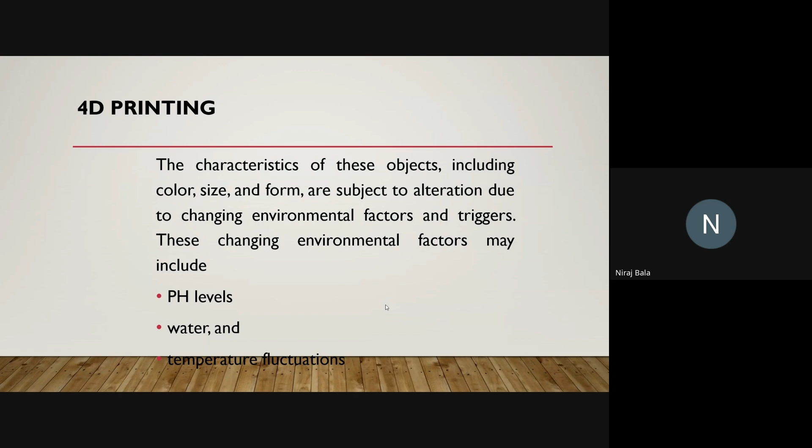So this is the concept of 4D printing, meaning changing anything like color, shape, size, or form, subject to some external environmental factor, which can be the pH level, pressure, water, or temperature fluctuations. So dear participants, you can see a number of applications where this 4D printing is also being used.

So dear participants, this is all I have to share with you regarding the different materials. I think, again, I have covered a number of aspects, and I have given you an overview of the different types of materials used and their different applications.